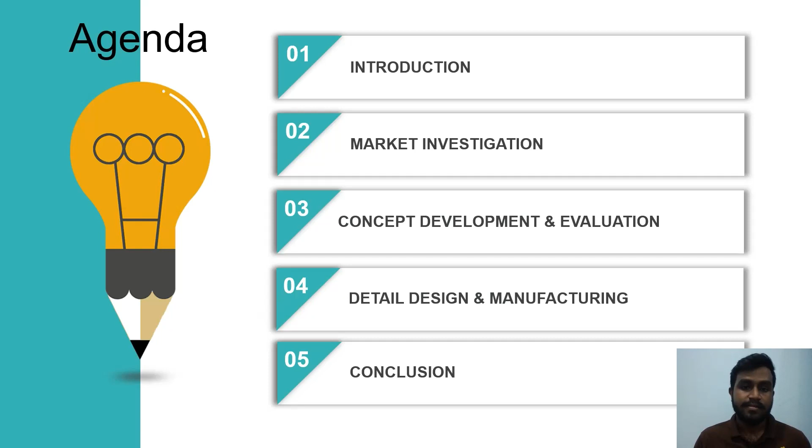Okay, let's start. In this slide, we have a few sections as stated here. Let's start with the introduction.

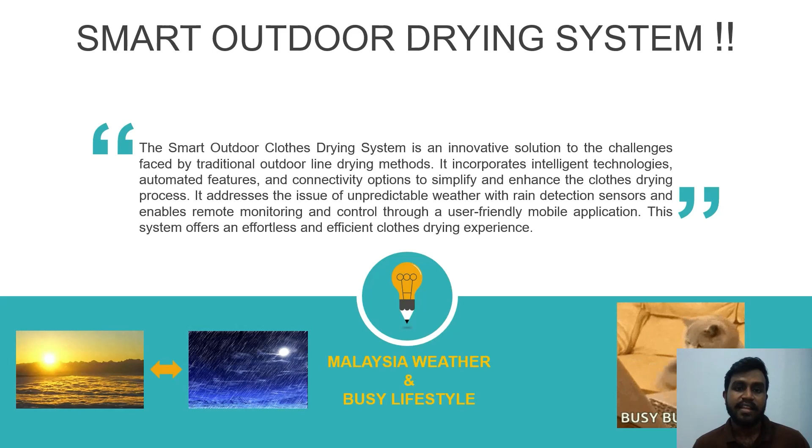My innovation for this assignment is a smart outdoor drying system. What is a smart outdoor drying system? Everyone knows that in Malaysia we usually dry our clothes outdoors, and sometimes we have a dryer inside our home. As Malaysians, we know our weather is sometimes rainy, sometimes sunny, so we really cannot predict it. We need a solution for drying clothes outdoor because the weather is unpredictable. That's why I'm suggesting the Smart Outdoor Drying System, to save our time, energy, and everything from our busy schedule.

This is the market investigation I have done. From the market research on the laundry market, Statista's market forecast predicted the market is likely to grow about 3.74 percent annually between 2023 and 2028. That's a very huge growing market, predicted to generate revenue worth US dollar 1.09 billion by 2023. This is the market research I've done based on the laundry statistics.

The target market for our product, the smart drying system, is around age 25 to 55. I chose this age range based on the assumption that these people will mostly be employed and working, so they might have a busy schedule. I did research: the population of Malaysia in the age group 15 to 64 is 23 million, as of 2023. Actually in this statistic they provided the range 15 to 64, but my target market is 25 to 55. From this data, I found that 16.06 million individuals in Malaysia are employed, meaning they have a busy working schedule. We can assume that as Malaysians.

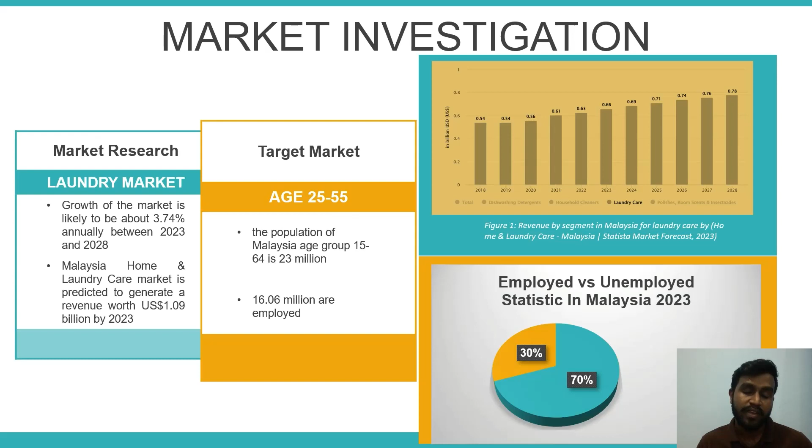Next, I have done a SWOT analysis on this product. First, strength: our product will have innovative technology, a smart system, which is time saving and effective. It will save your laundry time, and you don't need to wait and predict the weather. The process will be effective because sometimes clothes get caught in rain and we can't do anything about it. This system will also be eco-friendly and energy efficient. Typical indoor dryers need a lot of electrical consumption, but with outdoor drying we can save energy and make the system more efficient. The system will also have weather adaptability, so it can predict the weather and react accordingly.

Next, the weakness of the product is basically the costing. Because we are going to integrate a lot of technology, sensors, and mechanical components, it will cost much higher compared to existing products. The next weakness is reliance on mobile phones, since we will have software to control this system. If people don't have a mobile phone, which is a rare scenario, they will face difficulty controlling this system.

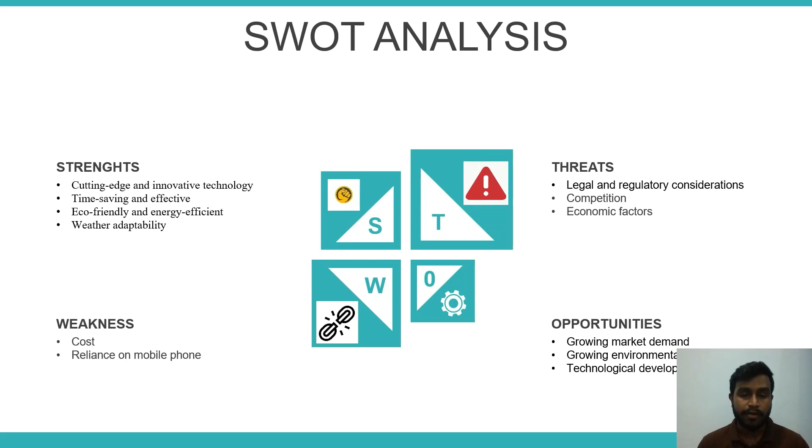Next, I'll go to the concept development of this product. We have 5 stages, 5 concepts. One is mobile application control, which I mentioned earlier.

So we'll have a mobile application to control the system, and we need to have a concept of energy efficiency, which consumes less power, less energy compared to the existing product. And auto shade adjustment, which is important, like when it's raining, it should find the shelter to protect the clothes from raining. And also a weather monitoring system. We will have sensors which monitor the weather outdoors, although we are not there.

And we'll also have the final concept, which is customized drying programs. These programs will be pre-programmed in the product itself. So when we are not reacting, or we didn't notice a notification, they will react based on the customized program. And also we can program based on the clothes, because all clothes have a special characteristic of drying. Next, I'll move on to the concept evaluation.

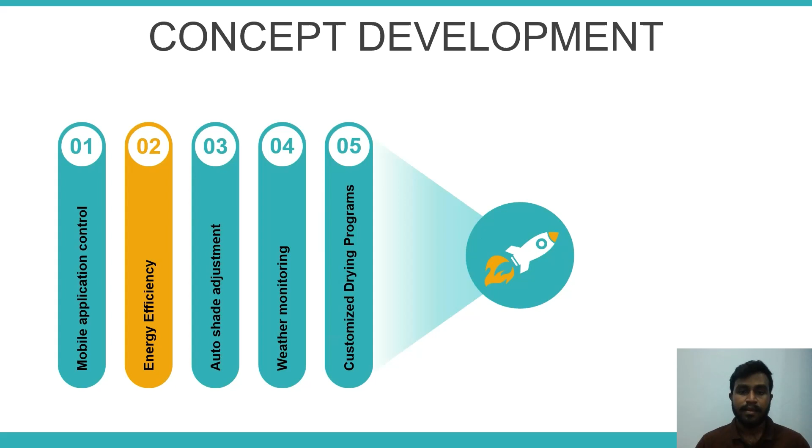So for concept evaluation, we need to have an existing product to compare with our product. So here I have chosen 2 reference items. I'm very sure you have seen this system in your home, like sometimes you might have reference item one, which is a wall mounted retractable clothes rack, and sometimes you might have reference item 2, which is a foldable clothes rack.

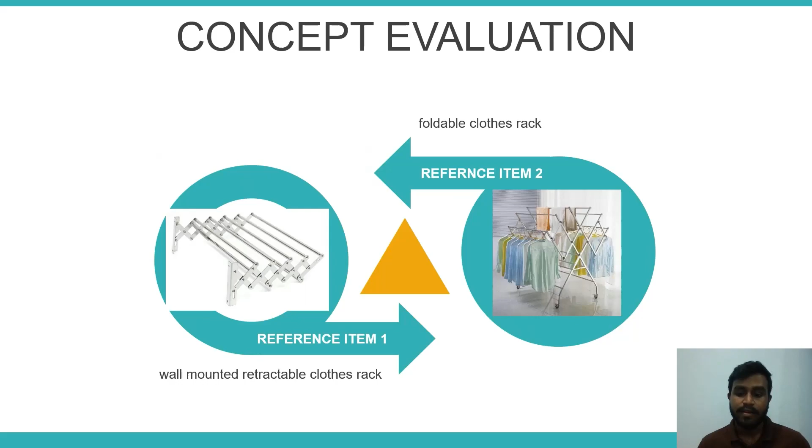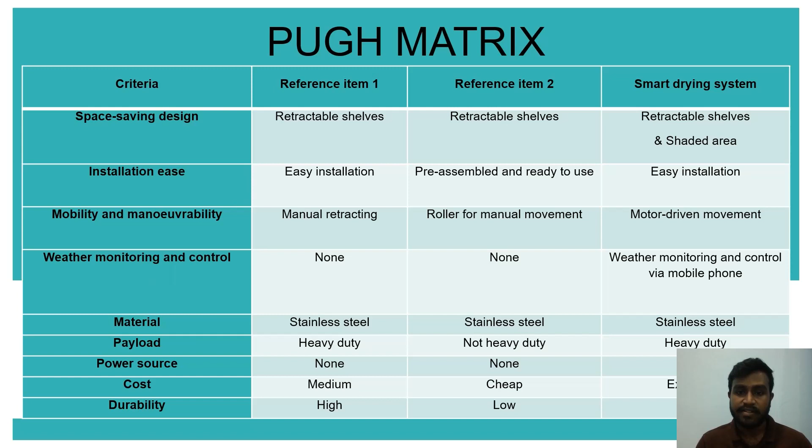So this is the Pugh matrix. So we have criteria, which are space saving design, installation ease, mobility, weather monitoring and control, material, payload, power source, cost and durability. And the reference items, as mentioned earlier, reference item 1 and reference item 2. So here we are going to compare with our smart drying system. So these are the comparisons with reference items 1 and 2. Based on this, we're gonna give weight to the criteria.

After giving the weight, we came to a conclusion that our smart drying system outstands the existing product in a few criteria, especially space saving design, the payload is gonna be more, and the mobility, it's gonna be mechanized mobility, and the power source. So basically it will have a power source advantage compared to the other 2 reference items, which need to be controlled manually. And also we have a weather monitoring system, and the product we're gonna create has high durability. So these are 6 criteria.

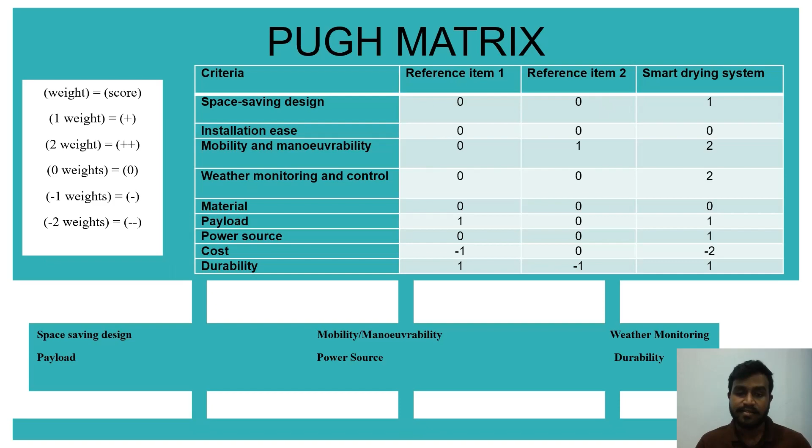Our smart drying system already eliminated the existing products, but we have to notice that reference item one is low cost compared to our product, and reference item 2 is much lower cost. So the costing is an issue in this Pugh matrix, but we can consider the other advantages, the 6 criteria in which we outstand. So these are the detailed design.

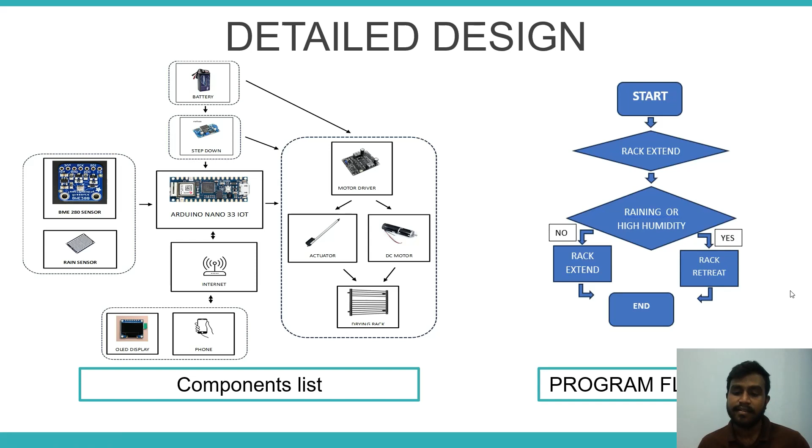And all these mechanized mechanisms tend to be prone to environmental temperature changes, so we need to have another solution for that. We don't provide detail on that here, but we'll have a system to protect them from the environment. So next, we'll see the working principle.

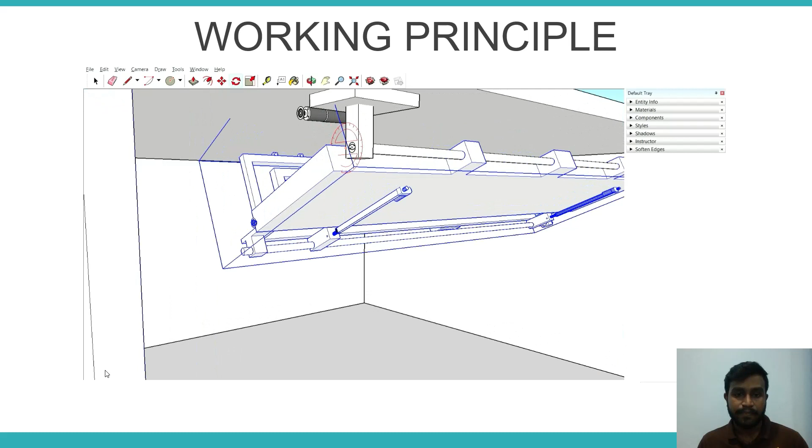So as we can see, this is the initial position. So once we want to start the cloth hanging process, which is the first, we will tell the system we need to start the process. So it will come down straight to us. Then we need to decrease the drying rack height, because we need to keep it as high from us, so we have more space.

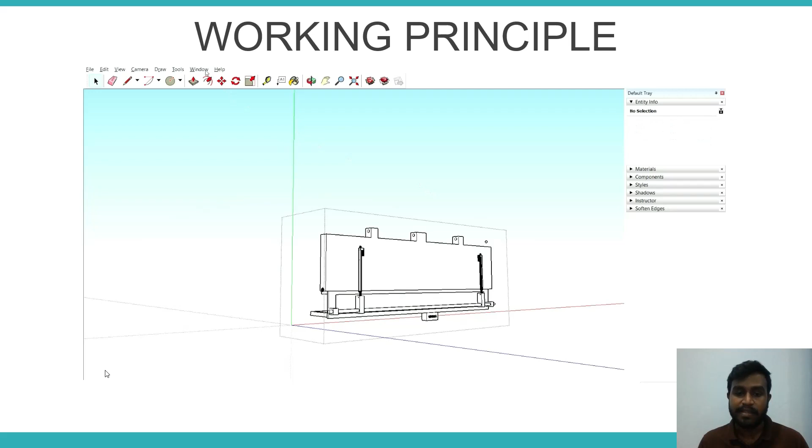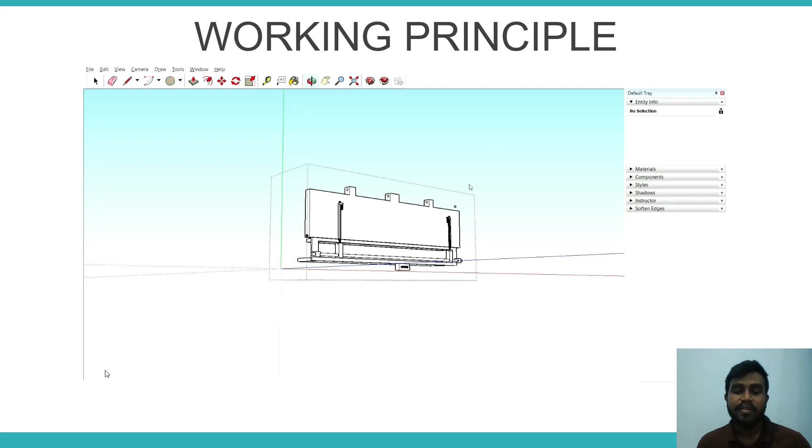So once we put it straight, we need to pull down the drying rack system using software. Everything is software. So once we finish hanging the clothes, we put back the drying rack into the slot. So we put it back, the actuator will pull back. Once the actuator pulls back, then we'll have the next step, which is the drying step.

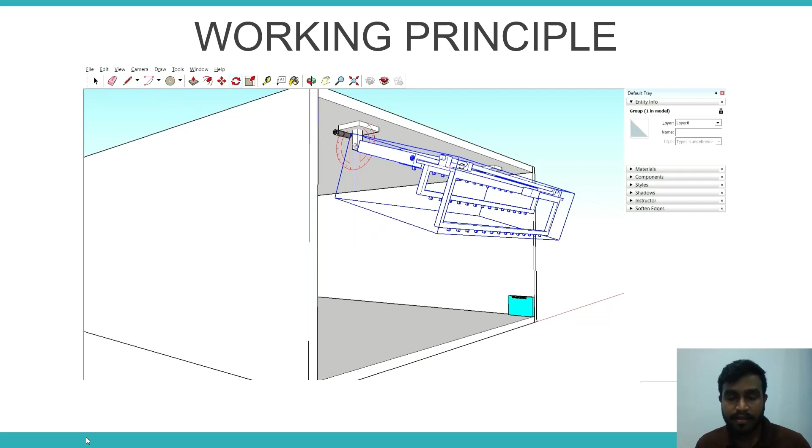So our motor, we can see the DC motor located behind, will use a chain system to use a rotational movement and move the drying rack towards outdoor. So it will move using the sprocket, the chain system. So once it moves outdoor, the actuator will push the drying rack further outside, so it will be more exposed to the sun.

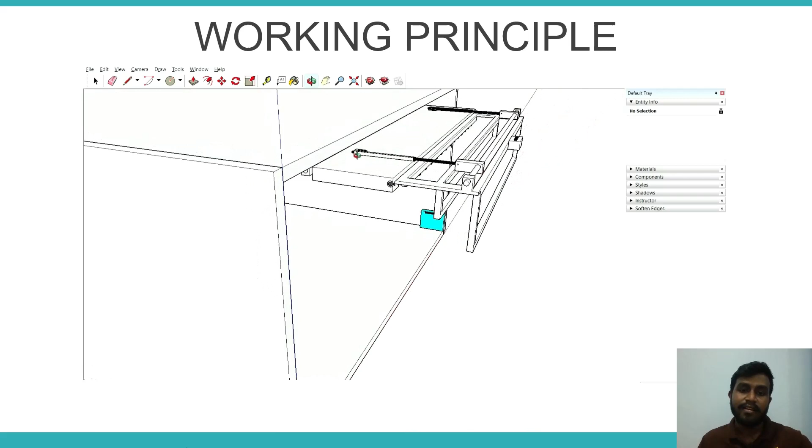So we can see it's moving outward. This is a slot system, so we'll have a slot for the actuator to pull and move the drying rack. We can see the actuator located on top, and we have a DC motor behind the hinge. So this is the completed stuff.

Then we'll have the next process of our product, which is the manufacturing process. In this, we have 6 stages. First, we need a design implementation, where we provide the technical drawing, where we're going to mount and place the sensor, all those stuff. The second stage is component sourcing. We will use standard parts existing in the market to reduce our cost instead of custom made.

We'll write the code, so we can test. Is it really collecting the temperature, humidity, and rain data? Is it reacting? Is it correct, accurate? Then we'll develop a mobile application for this system, so we can control it from our mobile instead of depending solely on the controller. Then we'll have quality control.

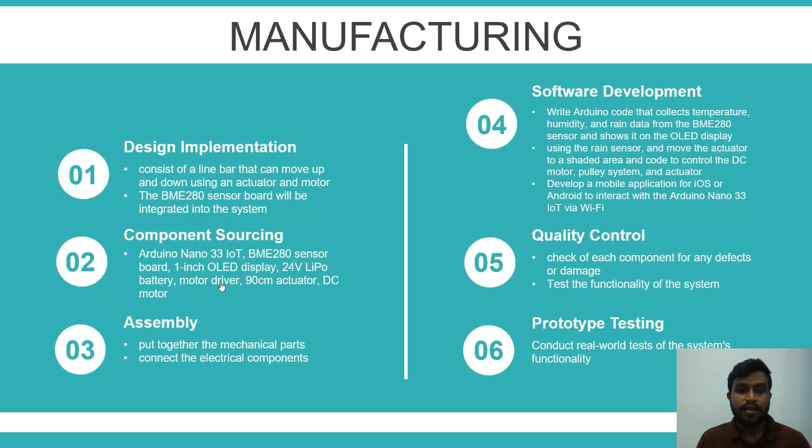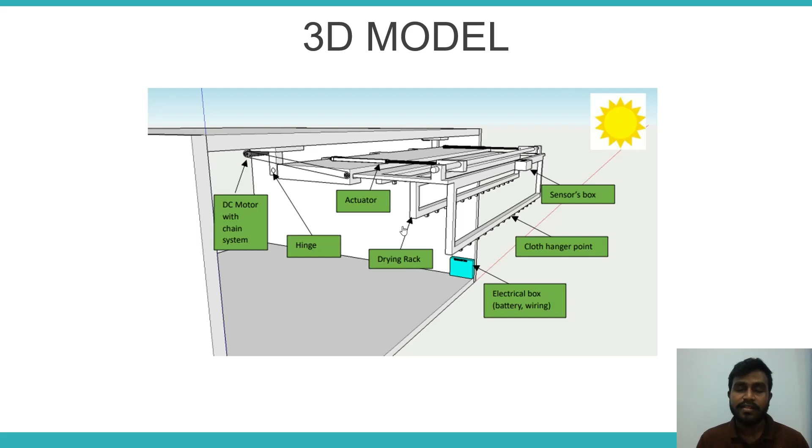And I forgot to mention, the iteration could be a more powerful DC motor, because we don't know the application and payload they prefer. So the DC motor, the actuator, and even the drying rack. Here I have made a solid bar, but actually it could be a scissor bar which is foldable. This is for the prototype, just for illustration, and this model is not to scale. So that's all from me.